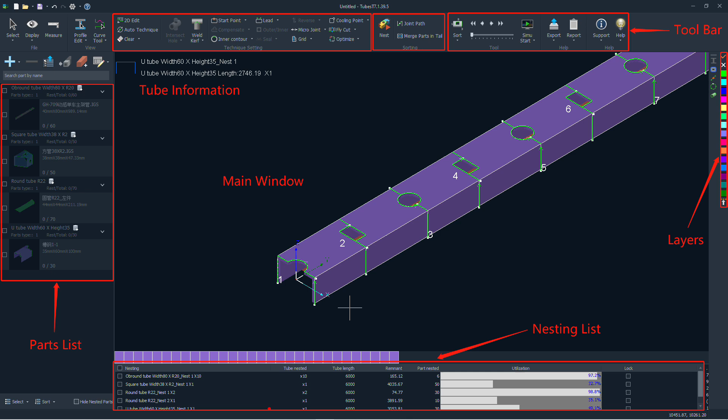Here are some main districts in TubesT you can pause to have a check. This video is divided into 5 parts: import, process, nest, sort, and export respectively.

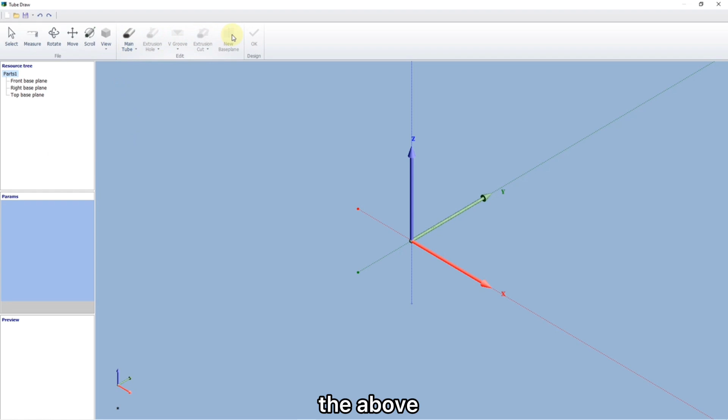The first thing we are going to talk about is import. After entering this software, the first thing we need to do is edit the parts. Here are some common approaches to do that. Usually, we choose to draw a part manually. Click this option and you will be led to a new page to finish the part drawing. The above are some import functions, and we will talk about them in detail in the near future.

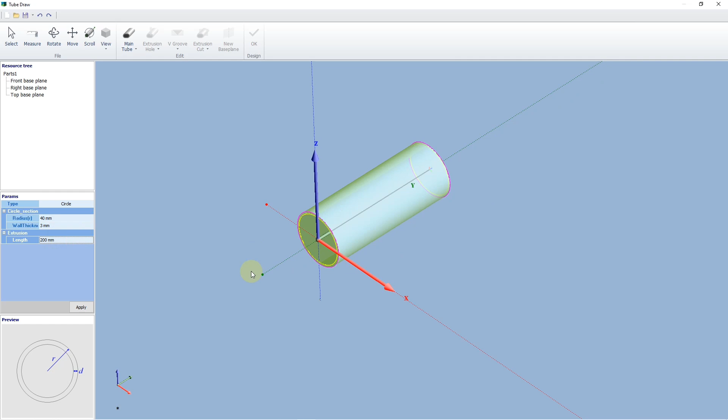Click Main Tube. You can select any shape listed here you want. In this blank, you can change the key parameters like length, thickness, and so on. It also supports adding a subtool with a designated shape. You are allowed to realize different effects by changing the parameters here. Click OK to save the change, and then we add a part into TubesT.

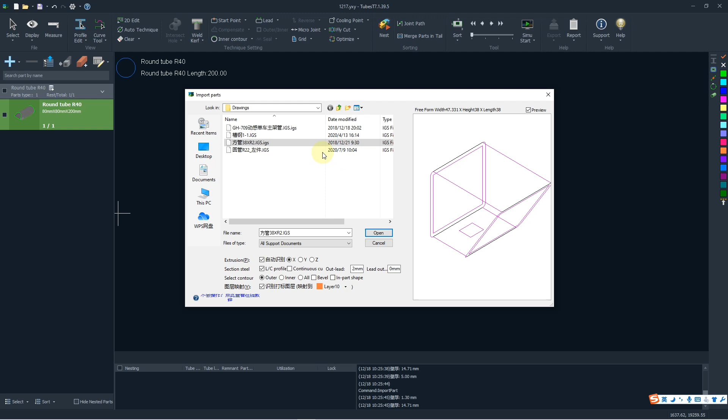There are other ways to import the parts. For example, you're allowed to import IGS and SAT files if the part has been finished in other software. Click the file and there will be a preview over here. You can also click to multi-select the files by holding Shift or Control.

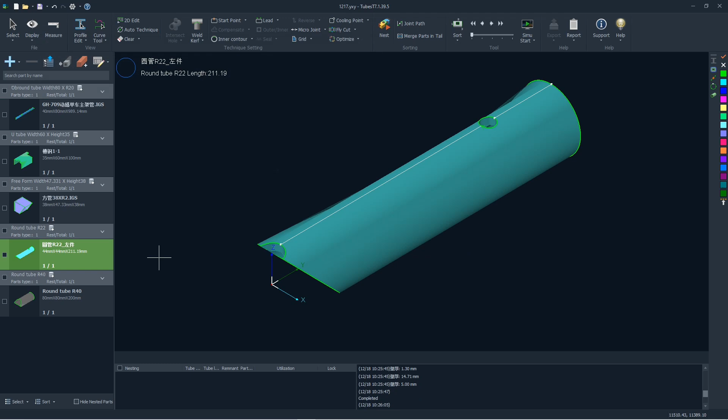All parts selected will be imported at one go. You can browse the parts respectively to check if they are imported correctly.

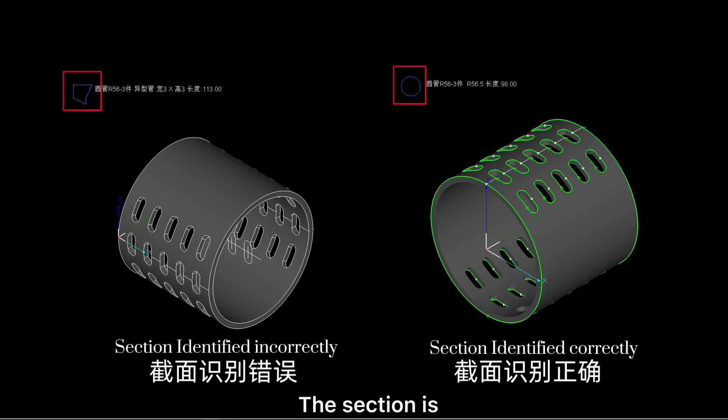To ensure that, you need to get 3 things covered. The section is identified correctly. Extrusion direction is along the y-axis. The cutting path is reasonable - generally, you need to check if there's no redundant cutting path. If the part imported cannot meet the requirements above, maybe there's something wrong in the import interface.

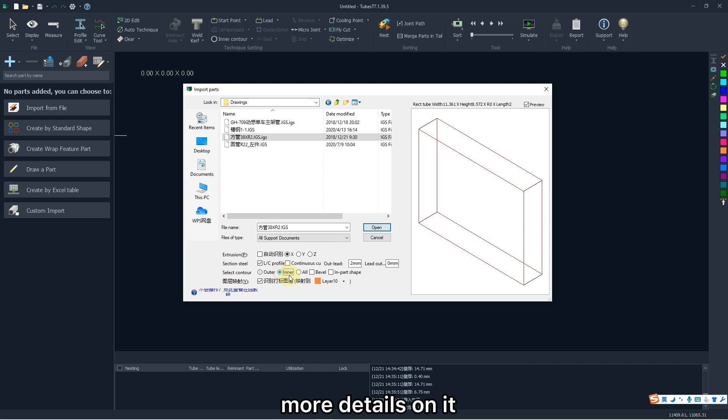More details on it we will talk about in the near future, and you can also contact us by email if necessary. As we can see, the parts imported are listed on the left side in different sections with previews. At the bottom, there are some convenient functions.

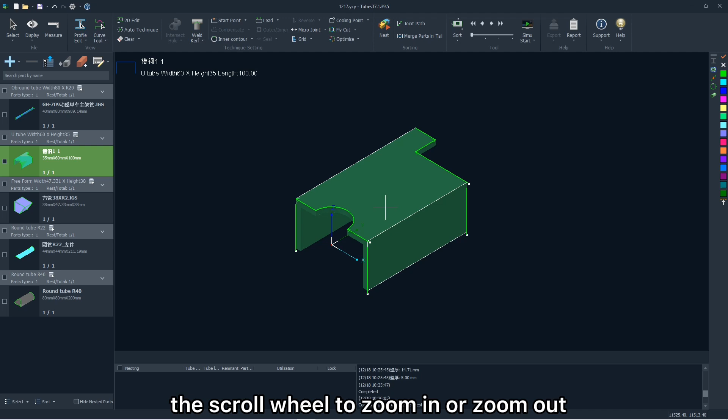Click the corresponding icon and the parts will be displayed in the main window, in which you are allowed to rotate the scroll wheel to zoom in or zoom out. Press the middle mouse button and move the mouse to adjust the view randomly. Press F3 to adapt the window, and press F4 to restore the default view.

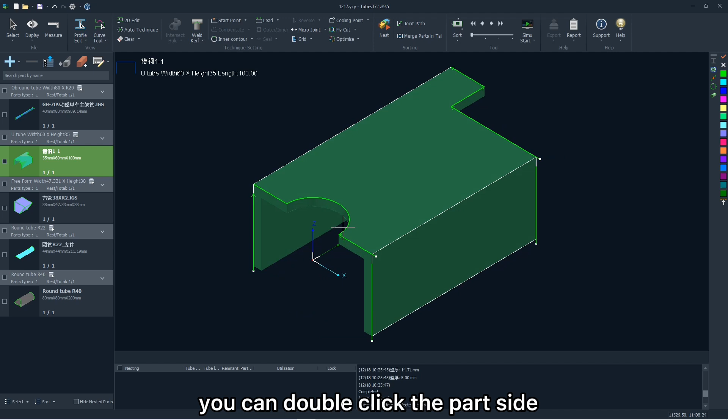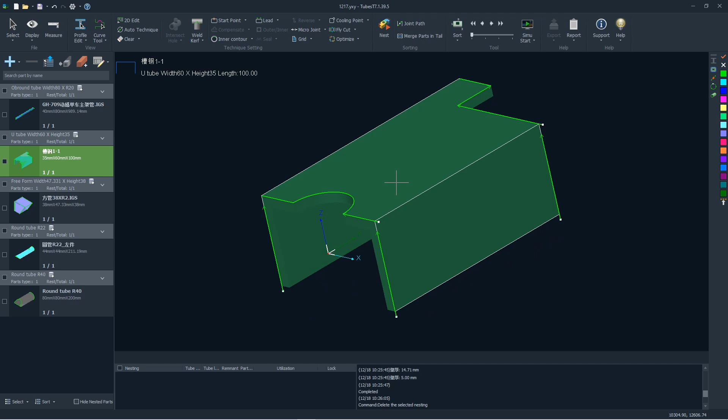Also, to change its view faster, you can double-click the part side and then select any one you want. Hold the middle mouse button and move the mouse to track the part position in this window. Press Shift and rotate the scroll wheel to spin it slowly. Press Shift and the middle mouse button to spin it a little faster. Press Ctrl and rotate the scroll wheel to spin it even faster.

Besides, you can click Display to modify the visual effect. Also, the interface skin and language are changed here.

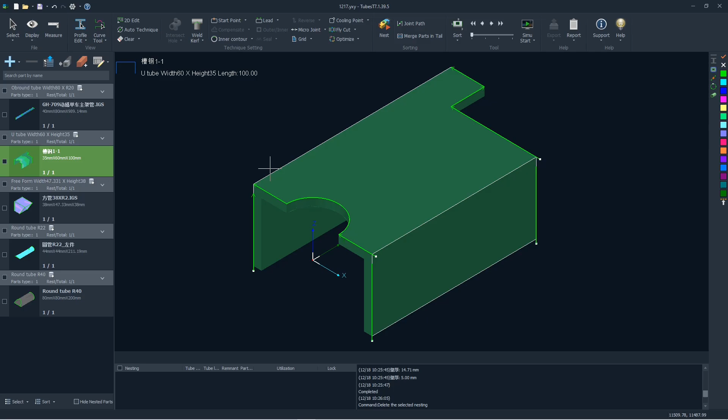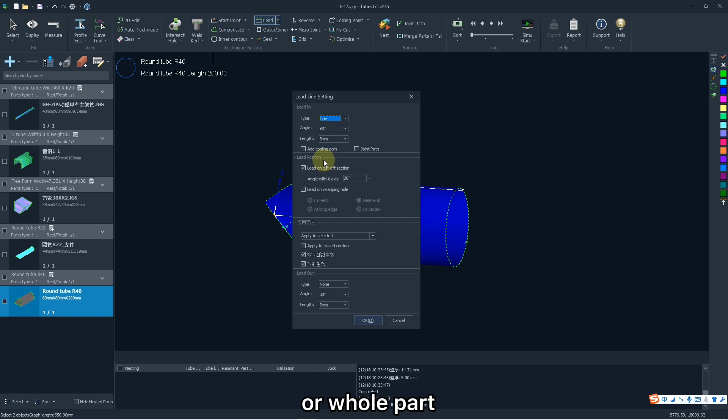Next, we are going to talk about the process, which has the capability to change the cutting path or direction by knowing the parameters of speed, gas, or something else in the cutting software. I will talk about some of the most common processes, like lead lines. Click a specific cutting path or whole part, then select lead lines and make some changes here. Click OK to generate the designated lead lines.

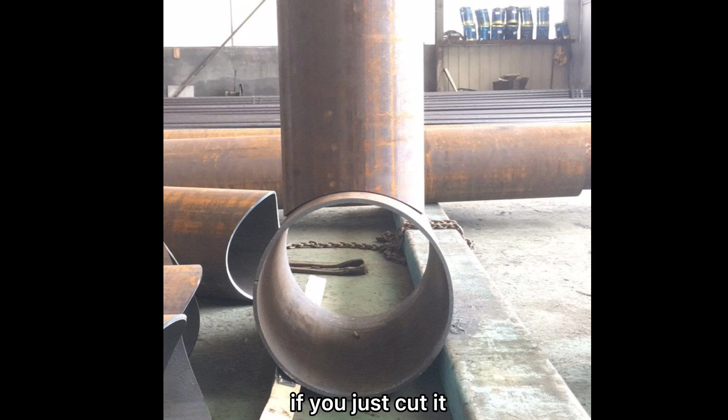Also compensation for special parts to be jointed into a T-shape like this. If you just cut it according to this kind of cutting path, there will be interference due to the differences between the inner and outer contour. To solve it, we can add a weld kerf here. Then TubesT will automatically generate a special cutting path to offset the interference.

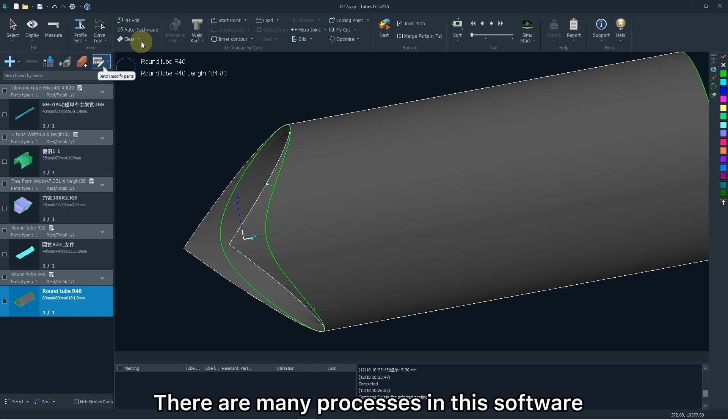Besides, there are many processes in this software. You can enable specific ones in auto technique. TubesT will remember settings in the future and will apply them on the parts imported or received. We will talk about it in detail before long.

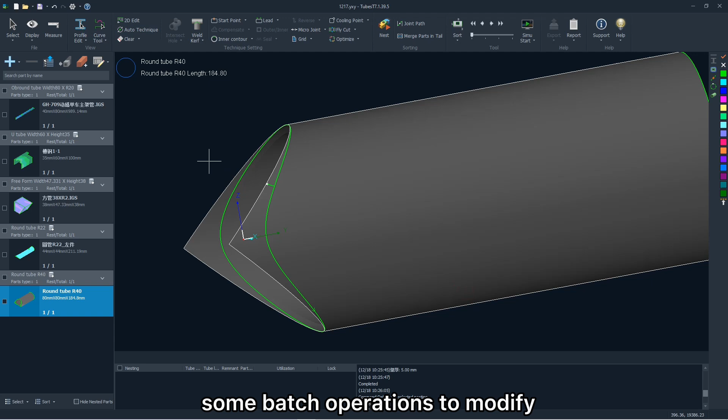Auto nest plays an important role in TubesT. Before that, we can make some batch operations to modify the part's name, amount, and if added, the text wrapped on the tube automatically. You are allowed to make some changes here.

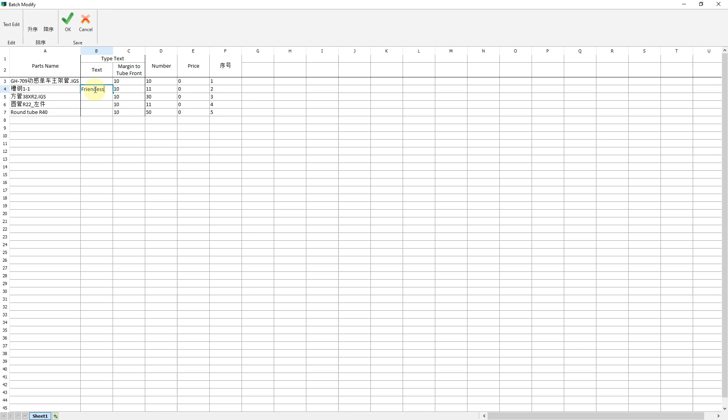Moreover, you're allowed to change them by clicking here. And also copy or even re-edit the part.

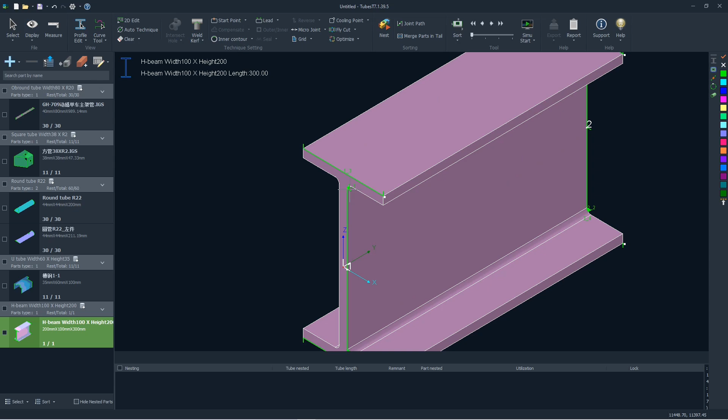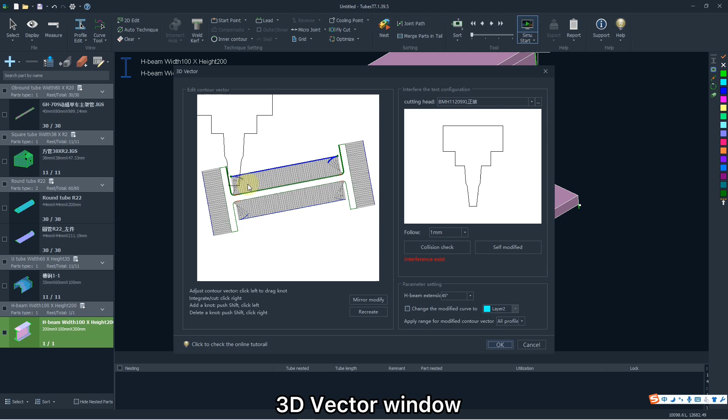For special parts like I-shaped ones, there may be interference in the cutting path. If you simulate it directly like this, TubesT will give you an error notification. Click OK to enter the 3D vector window. Here you can have a collision check, and you can choose self-modified or not according to the actual result. But if you do, the 3D vector will be modified automatically and correctly.

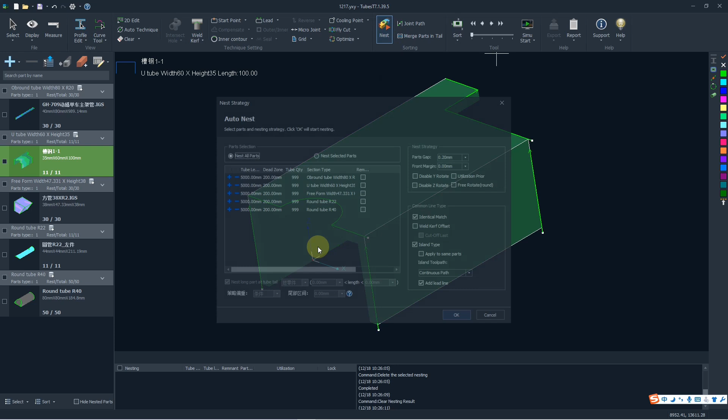Click Nest. In the pop-up window, here is the tube information, including the length, dead zone, amount, section type, and remnant.

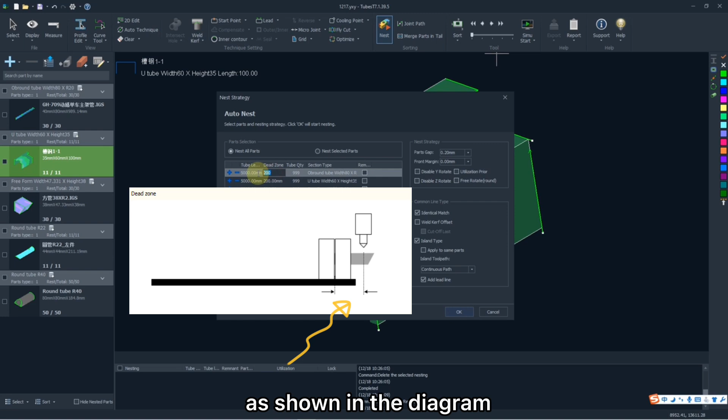Among them, dead zone means the tube length which cannot be cut, as shown in the diagram. It is necessary to get it right. The tube amount is suggested to be sufficient enough so that the parts can be nested completely.

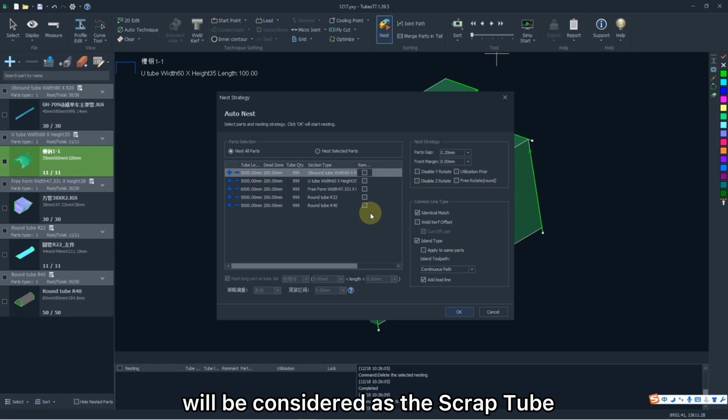The parts with different sections will be nested on different tubes. If you enable this remnant option, the corresponding tube will be considered as the scrap tube, which will be nested in the first priority.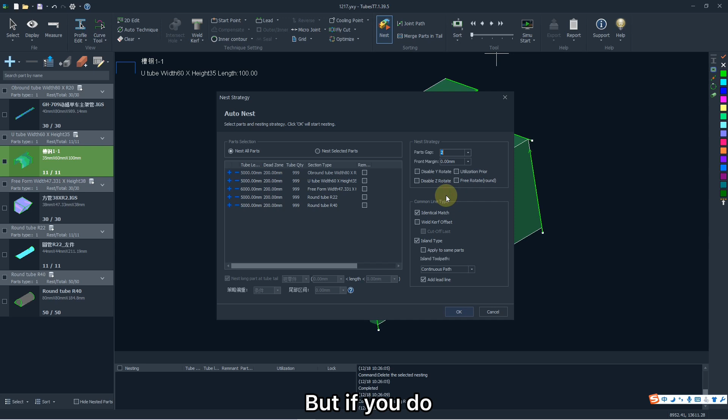On the right side, part gap means the interval between every two parts if you don't enable common line. But if you do, this parameter will be invalidated by default. Generally, you are suggested to enable identical match.

As for the other functions, today we are not going to describe them in detail due to the limited time. Click OK to start AutoNest.

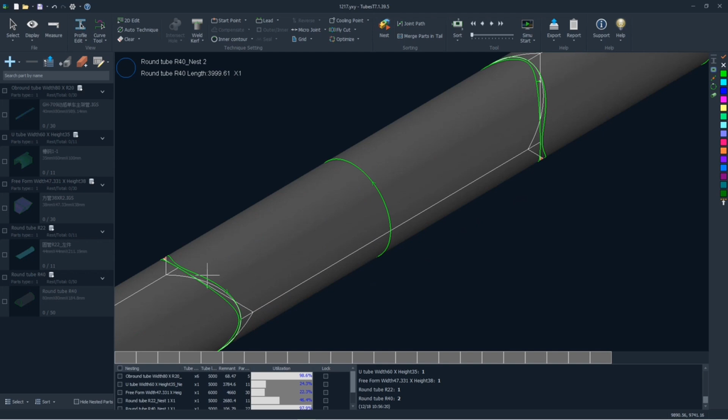Here you can see that the part without common line has an interval, which we set just now, and the part with common line, this option is disabled.

The bottom is the nesting result zone, including some main information in which every line corresponds to one kind of nesting result. Double-click it to have a check.

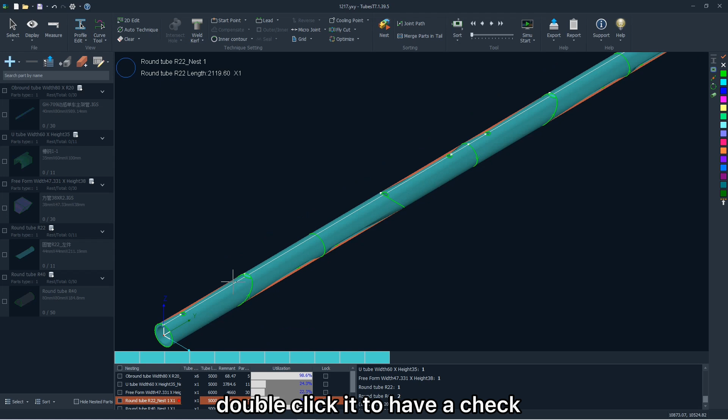Here you can see the nesting name, which is the same as that of the files imported, including the section type, size, fillet, and cutting time. Cutting time means the time the parts will be machined.

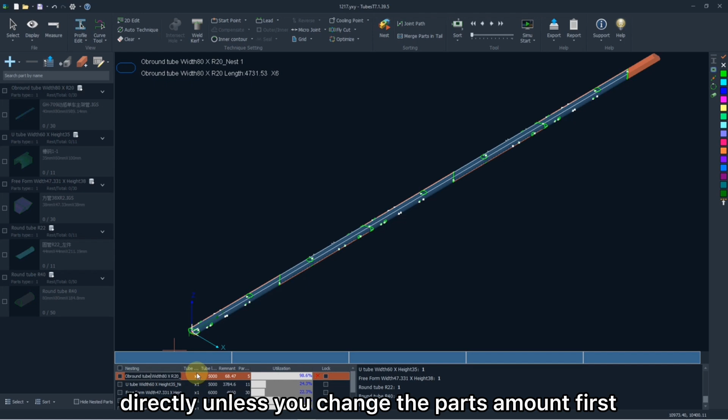Theoretically, it cannot be modified directly unless you change the parts amount first, so it is unnecessary for you to calculate the cutting time of the nesting result yourself.

Also, the tube length, parts amount, and some details will be shown here, and you are allowed to change the blank size manually.

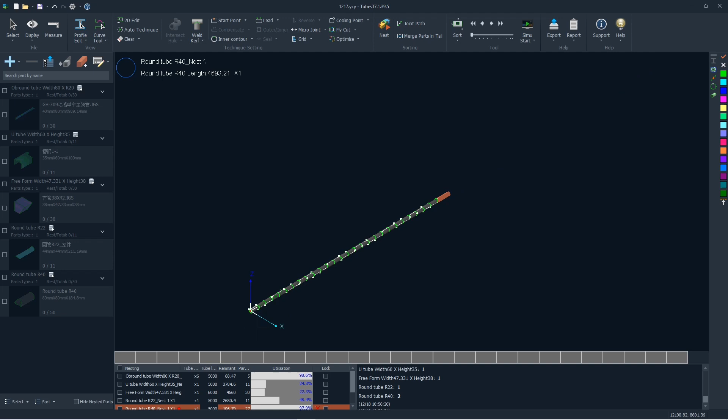If you are not satisfied with the current nesting result partially, double-click a specific part. There will be some operations here to adjust it, like moving forward and backward, or rotating it in clockwise or counterclockwise direction. More details about the nesting strategy will be introduced particularly in the future.

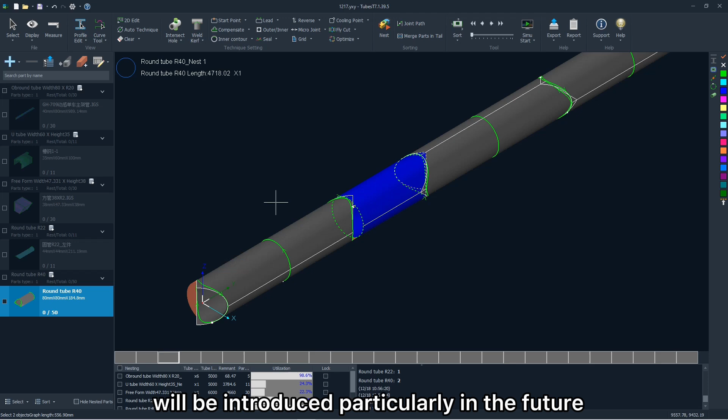But if you have any questions, please share them with us by email.

The next is sort. Theoretically, TubesT will sort the cutting path automatically from the top to the tail of the tube, but you are allowed to sort it according to different strategies.

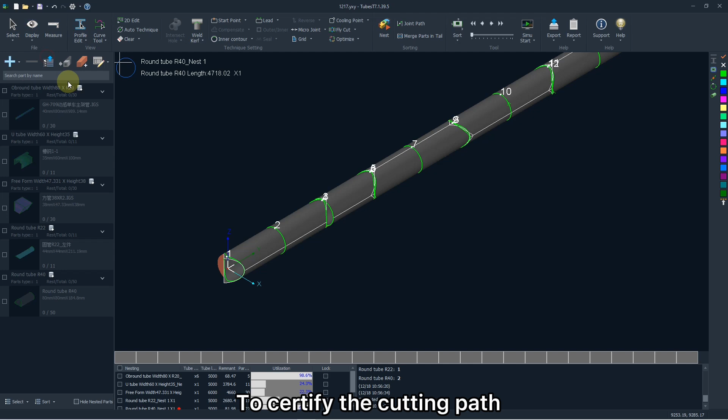To certify the cutting path is reasonable, click here to enable the Display Sequence tag to check the cutting sequence.

Statically, you can click the inner arrow to verify every cutting path manually. Yellow means they're certified, blue the current, and green the to-be-certified.

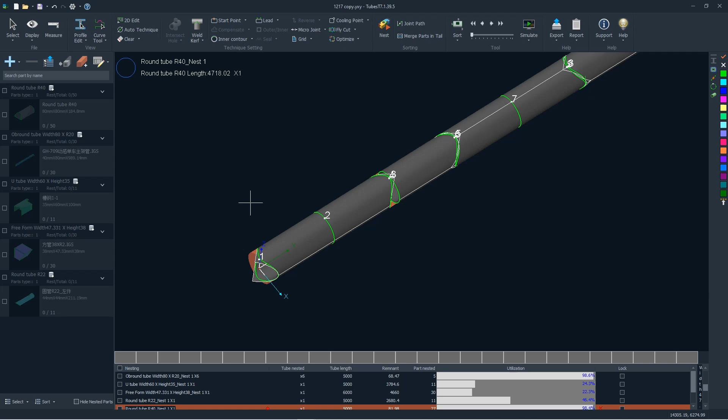Dynamically and more vividly, you can click Simulate to generate a virtual cutting head, which can be customized to simulate the actual cutting. Also click the Alt arrow to adjust the simulating speed.

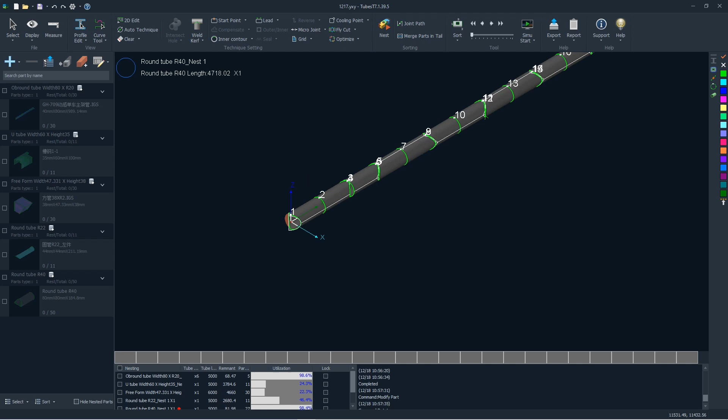Also click the Alt arrow to adjust the simulating speed. If you select one or a group of cutting paths, this specific part will be simulated only.

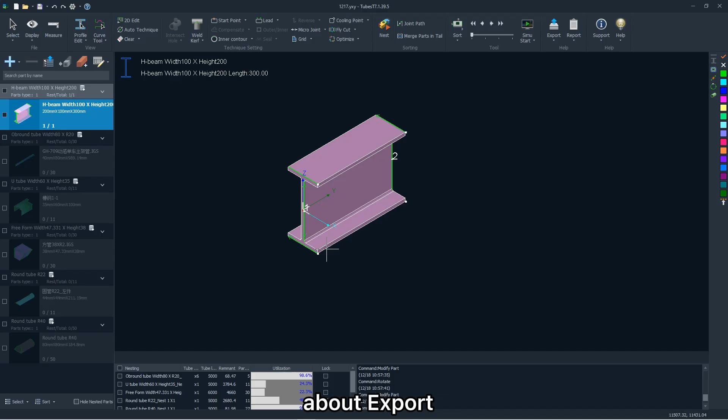Next we are going to talk about export. Click this icon on the left top of the interface.

TubesT will export a file in YXY format, which is not used for cutting software, but an engineering file for nesting. It will save all the results nested, parts imported, and the processes added.

If you want to modify it lightly, like changing the cutting path partially, just open this file, which is able to save much redundant operation. Then you're allowed to continue the editing saved at a later time.

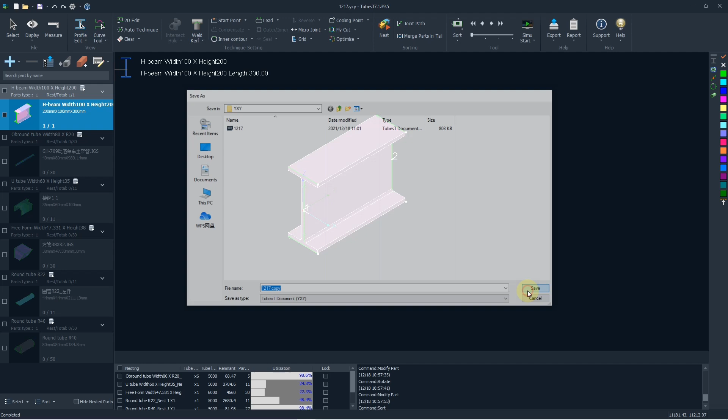Also, you can right-click the nesting result and click Export to generate specific files.

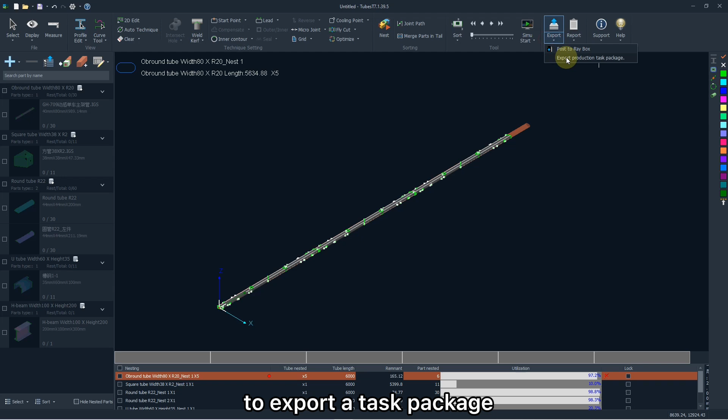Besides, you can click here to export a task package, including a group of files in ZX format. But it is necessary for you to use TubePro in the version corresponding to TubesT.

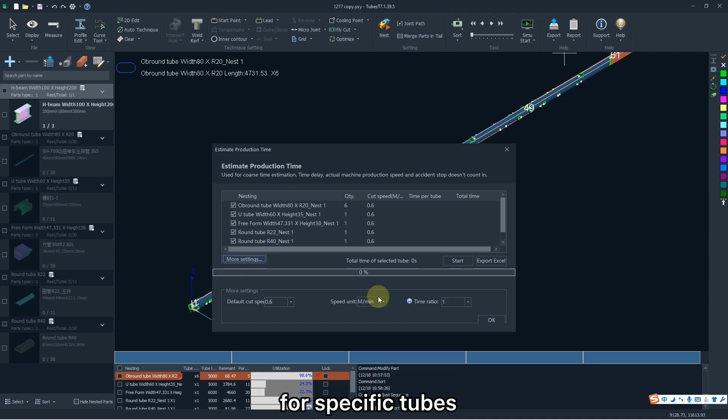And you can also check the time estimate for specific tubes. Parameters here can be customized by yourself.